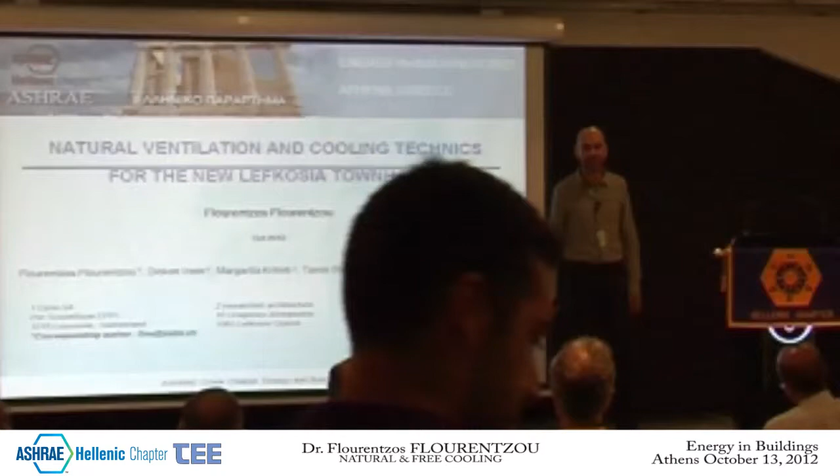Καλησπέρα. I still hesitate if I speak in approximate English or in approximate Greek. My last speak in Greek, I did it when I was in the 5th class of secondary school. I don't know if I managed to do it, as there are not so many English-speaking people, I will try to speak in Greek. Συγγνώμη για τα ελληνικά μου, έχει πολλά χρόνια που είμαι στο εξωτερικό. Forgive me for my Greek, I've been abroad for years on end, so I will try to improve my Greek.

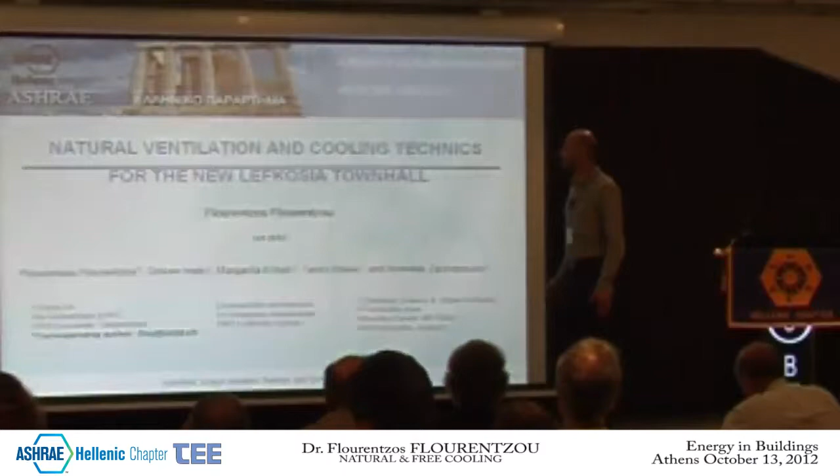Nonetheless, I will discuss natural ventilation and cooling techniques, using the Town Hall as an example. Μόνος μου δεν θα μπορούσα να σας μιλήσω για αυτό το κτίριο αν δεν ήταν ένας αρχιτέκτονας πίσω για να ακούει ένα φυσικό, αν δεν ήταν μηχανολόγοι πίσω για να ακούν τις ανάγκες και να μπορούσαν να προσφέρουν τις τεχνικές λύσεις. Είναι μια συλλογική δουλειά.

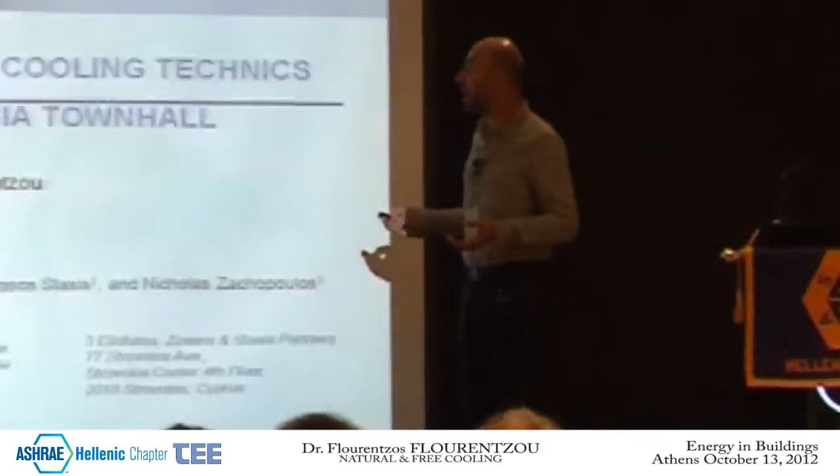Μιλήσαμε για passive buildings. Για να καταλαβαίνετε τα μεγέθη, ένα passive house στην Ελβετία είναι 30 κιλοβατόρες ανά τετραγωνικό και εγκαταστήνουμε 10 βάτα ανά τετραγωνικό μέτρο για τη θέρμανση. Ένα διαμέρισμα 200 τετραγωνικά θέλει 2 κιλοβάτ θέρμανση εγκατεστημένη. Δηλαδή μπορείτε να θερμαίνετε το σπίτι σας όταν το heating system χαλάσει, με ένα πιστολάκι μαλλιών μπορείτε να θερμαίνετε μια κατοικία. Αυτό είναι το passive house.

Μιλούμε για άλλο πράγμα, δεν μιλούμε για τα ίδια κτίρια που γνωρίζουμε. Και οι αρχιτέκτονες και οι μηχανικοί θα έχουν τεχνικές απαντήσεις για άλλο πράγμα από αυτό που ξέραμε. Είναι άγνωστο, όταν είναι άγνωστα πρέπει να τα προσομοιώνουμε, θέλει γνώση. Θα μιλήσουμε για passive cooling, δηλαδή δωρεάν cooling. Αν ήταν δωρεάν θα τρέχαν όλοι να πάρουν, αλλά δεν είναι δωρεάν, χρειάζεται γνώση. Και επειδή η γνώση θέλει κόπο, θέλει κούραση, θέλει μελέτη, δεν πάει κανένας να τα πάρει και προτιμούν να πληρώνουμε πετρέλαια, να πληρώνουμε μηχανήματα.

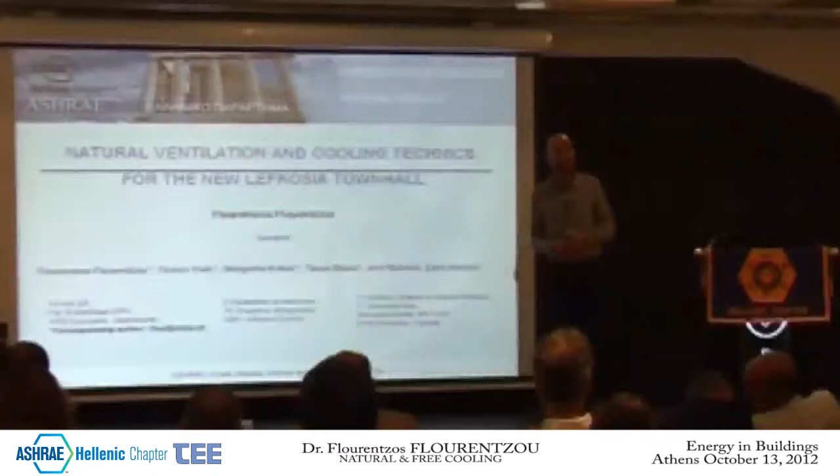Είναι όμως δυνατόν, θα σας δείξω ένα κτίριο που η πρώτη φάση ήδη... Well, I'll show you a building. Stage 1 is already up and running. This is the town hall of Nicosia.

Πολιτικοί έκαναν θεμέλιο λίθο. They were there, they inaugurated the building, they laid the foundation stone, and so they bumped into an ancient church. It seems there were 3 layers of antiquities there, a medieval town, a Byzantine one, and a Hellenistic one below that, so it took archaeologists 8 years to clean up the surface area. And so here you have it.

Ευτυχώς η UNESCO, ευτυχώς για το Δημαρχείο, έχει πει ότι απαγορεύεται να κάνουμε εκσκαφή σε όλο το χώρο, πρέπει να μείνει υπόγειο για τις επόμενες γενιές. It's imperative that we leave at least 1/3 of the plot to the next generations, because the next generations of archaeologists will come up with new ways to proceed with exploration. And so instead, architects could have built something on top, or they could have built columns and pillars.

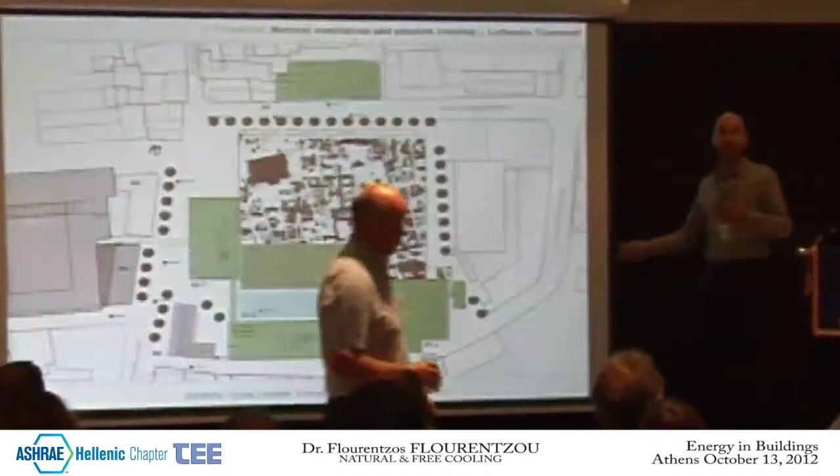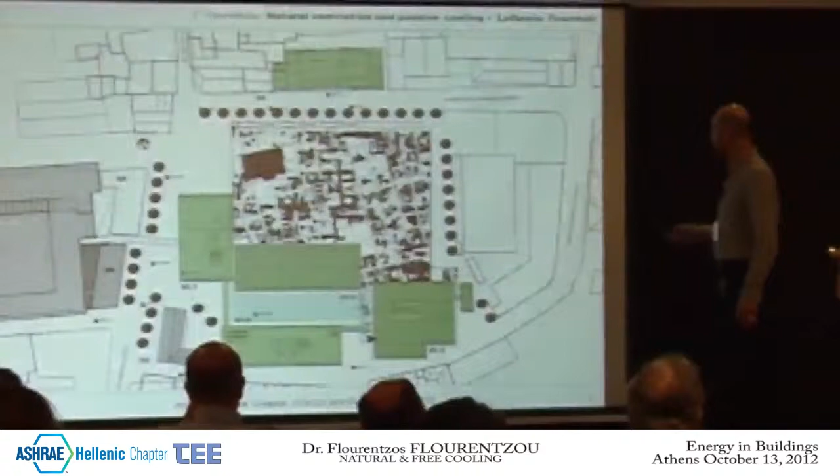I was in touch with the architect. I would tell him about the guidelines and the principles, and he would make plans. I'd tell him what's operating and what's not. So this is what we got. We have the square, which allows for passive cooling, and moreover, it allows for visitors to look at the antiquities as well.

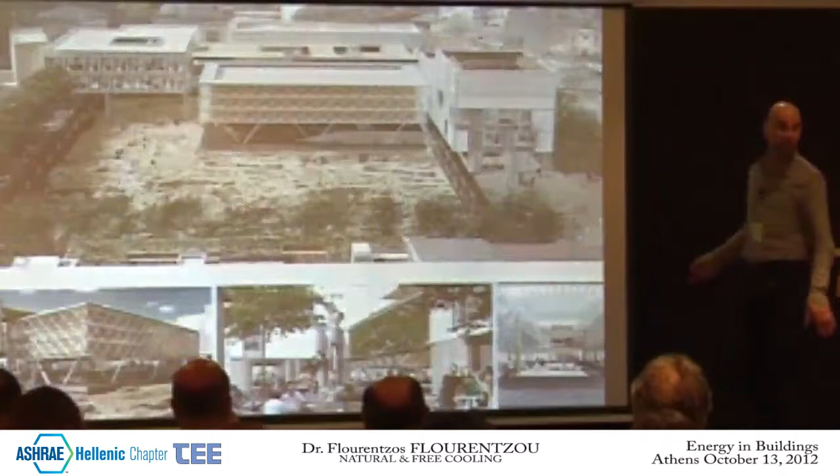This is a simulation. This is a building that is almost complete by now. And the building will look like this. We will have 3 buildings for offices, one for the so-called municipal hall or city hall meeting premises, because it has to be light, and the antiquities are below.

We also have the shadowy areas. We tried to have green areas and spaces. We didn't just want to have natural cooling, but we also wanted to have good conditions on the outside. This is the part of the construction that is already there. Let's have a look at the figures.

If the building was constructed back when there was no thermal insulation and no relevant regulation, it would have needed 200 kilowatts per hour per square meter for ventilation, heating and cooling. Then we had the regulation which has just been ushered in. You've had such regulations for years in Greece, but it's new for us. If you have 4 centimeters of insulation and 3.5 for glazing, that's the U value, you can diminish the cost by half.

So we solved one problem. But then the problem became quite more acute because single-pane windows have no losses now. So in our case, we're going to go below 40 kilowatts per hour. Minergie calls for 40 kilowatts per hour primary energy.

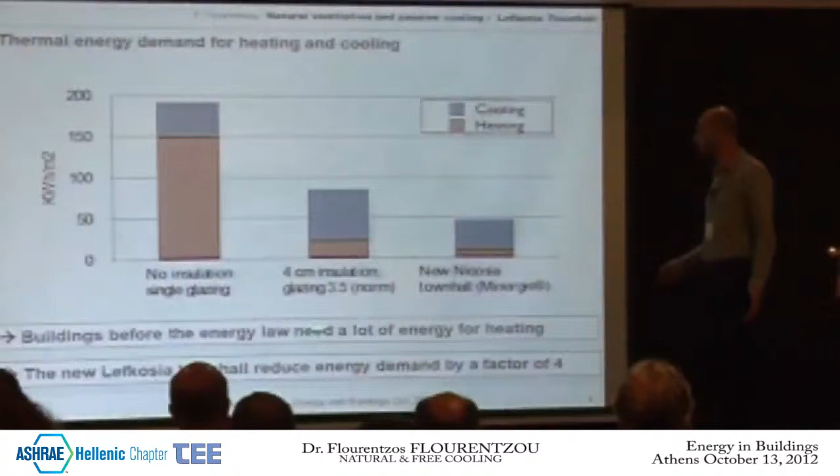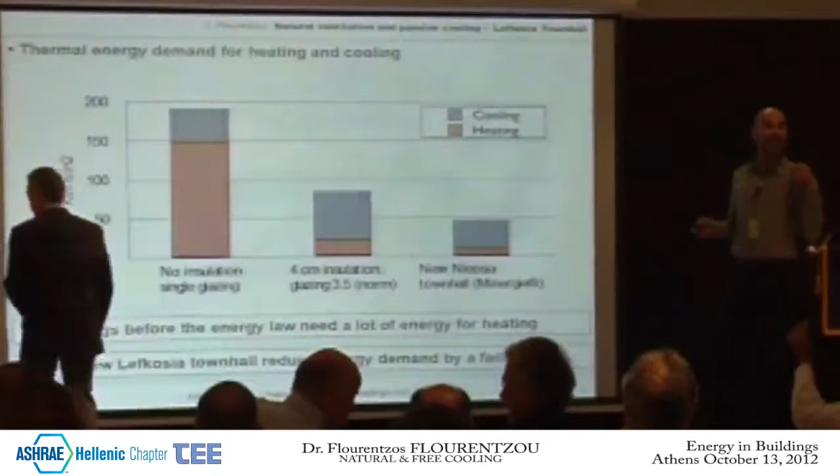So the buildings, before the energy regulation came, were consuming a lot of energy for heating and cooling purposes. This applies to Athens, given the photos we've seen. And even if you don't have thermal bridges, if you have some sort of insulation, things improve. And the new city hall of Nicosia is going to bring consumption down by a quarter, or rather divide consumption by 4.

And this is season 2 for carbohydrates - hydrocarbons, rather. We have consumed half of the oil that's on this earth. In this second stage, we will have to pay a higher price for oil. So we will have to make the relevant calculations.

I have a 30-watt computer there for one company to be able to sell that, and for it to have 5 hours of standing battery, well, that's changed, so you have to divide by 10. When there is a need, there's technology.

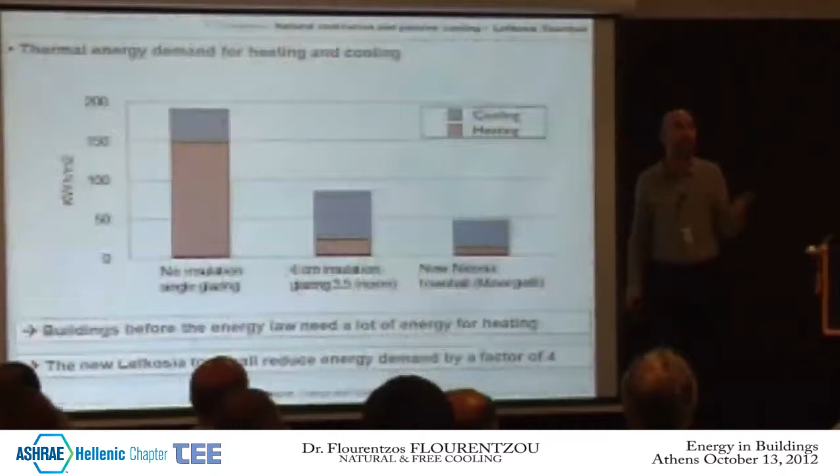Now, where can you get hold of this technology? In every house, unlike computers that are produced in plants, in every house you have architects and engineers who have to make leaps and bounds technology-wise.

We use 10 passive techniques in this building: 10 centimeters thermal insulation, double glazing, low E, and no thermal bridges. Moreover, we have almost perfect solar shading.

We also had high apparent thermal mass, optimum dimensioning of openings for passive lighting, 70% of natural light autonomy, and high efficiency artificial lighting.

You see, if you don't have thermal mass, you know what the impact will be, or we will discuss it later. The dimensions of the openings need to be optimal. We have to find trade-offs.

For lighting, heating, and solar protection - every use and every space has different needs.

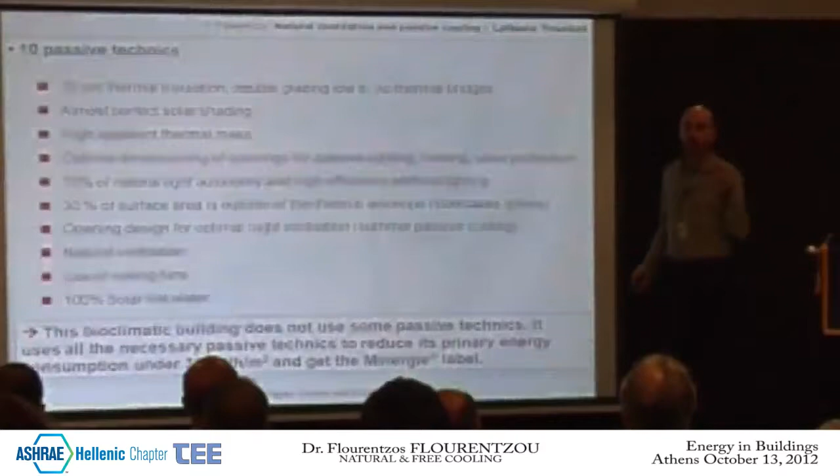Mr. Papadanil, of course, used a rule. He said we will all have no openings in the north. Please don't use it in your offices. Your rule, Mr. Papadanil, applies to residences, but it doesn't apply to office spaces here in the Mediterranean. It works in Switzerland, but not here.

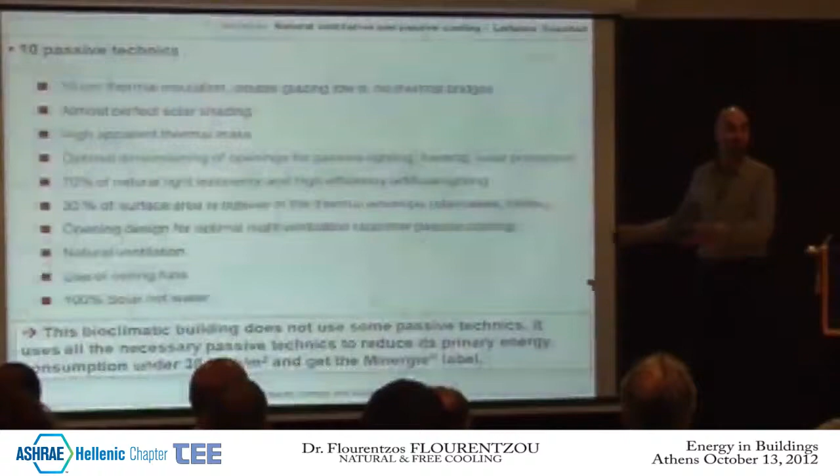And then you have 70% natural light autonomy, like I said, and high efficiency artificial lighting. We can't have conventional lamps and air conditioning working in one place. Maybe in Switzerland that would be okay because it contributes to heating the area. But in this case, in this part of the world, it wouldn't work.

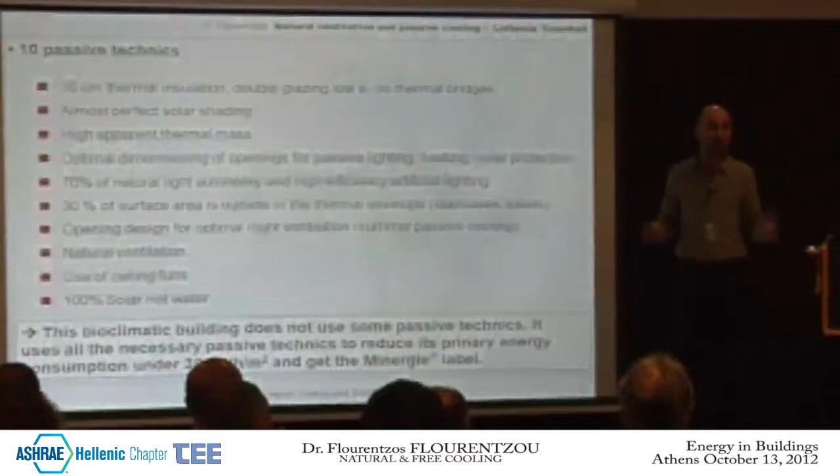30% of the surface area is outside of the thermal envelope. And this, of course, wouldn't work in Switzerland. But you see, we in Cyprus have sunshine for almost 300 days a year. We can actually go outside and have a picnic at Christmas time, for that matter. So we have different needs.

Opening design for optimal night ventilation, summer passive cooling, natural ventilation, and use of ceiling fans. Maybe ceiling fans will seem to you as quite an obsolete technique, but let's see what they can do to a passive building.

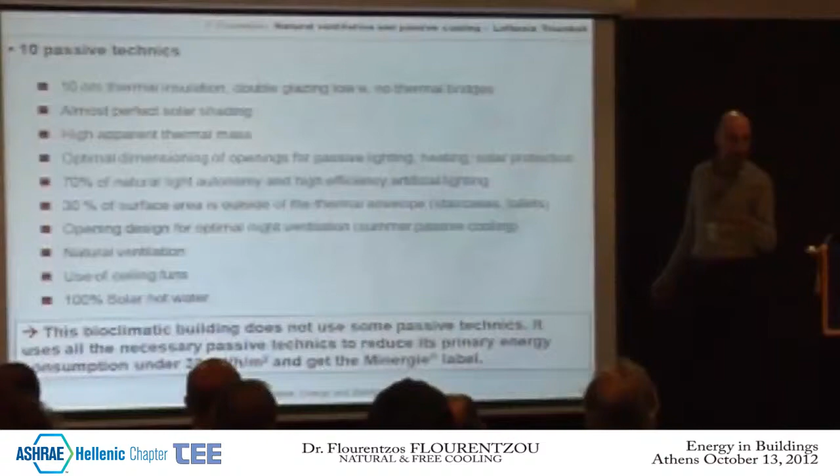And then you have 100% solar hot water. When you get sunshine for 300 days a year, you are not going to use electrical power.

This bioclimatic building does not use some passive techniques. Okay, we've seen such buildings. We have a well, we have a louver, we have a channel, and you can get the air in. These are some scattered pieces and bits of ideas.

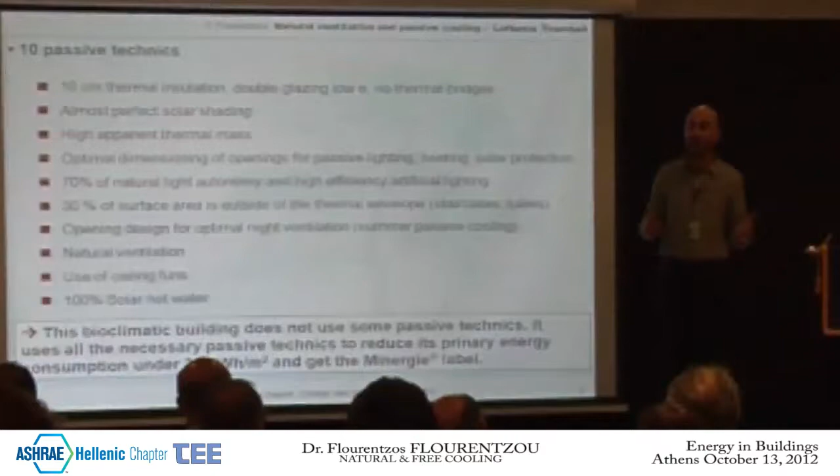The Swiss have a lot of good things to suggest, and they also have a few bad things to suggest, and this goes for Cyprus as well, it applies to us. One good thing I borrowed from the Swiss is that they say one thing, they do that thing, they see how it works out or not, and then they try to improve.

They make measurements. How much is consumption? Primary energy, 38 kilowatt hours per square meter. Okay, this is bioclimatic, but as long as it pays out, as long as it gets results.

This is what we did in the case of this building. This is not one simple building that will be comfortable. My grandmother's house was actually bioclimatic, but its energy consumption was zero.

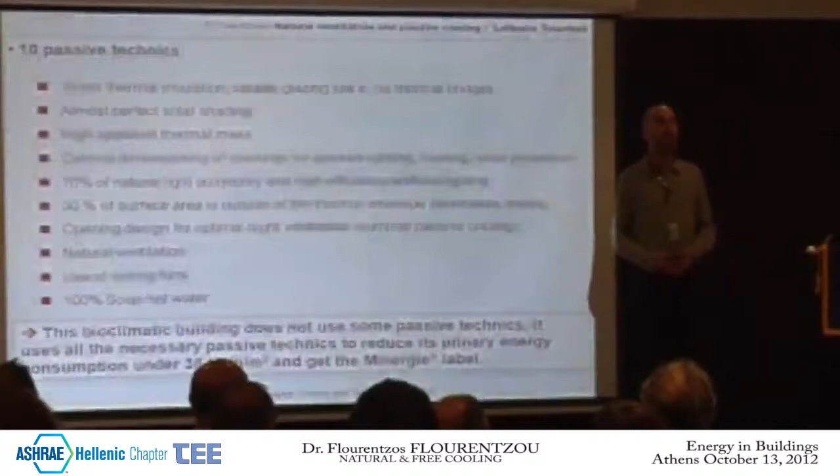Then again, it didn't have 500 lux that was self-standing for you to work in your office. And in my grandmother's house, the temperature was good because the outside temperature was 45, and then within the house, the temperature was 32 degrees.

Minergie is something that you heard about this morning.

Let me start with thermal insulation. We went from 5 centimeters to 10 centimeters, and there's more to it than that - thermal bridges were taken into account, and we opted out of thermal bridges. We did use thermal insulation on the ground. On average, temperature in the summer is 20 degrees, but we needed thermal insulation at the base of the building because without it, you would get the cold in your feet. So we have thermal insulation there.

U value is 1.3. The glass panes were made in Cyprus, 1.3 U value. You don't have to import them, you don't have to buy them from Germany. No such need.

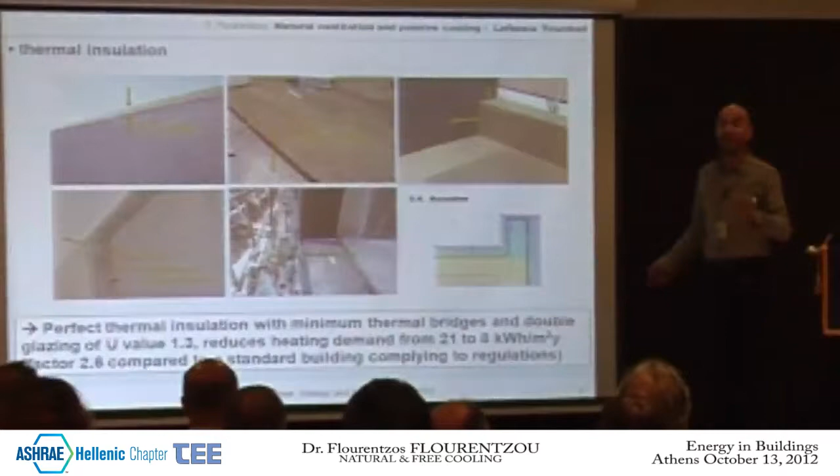So from the reference building of Cyprus, we got down to 8 kilowatt hours per square meter, which is next to nothing. I mean, your hairdryer would need more.

This worked for 1 year. It was actually constructed, built last year. I went there in the summer. They told me it worked okay, better than the simulation tests. They told me that they would just heat the building for a quarter of an hour and it would do for the rest of the day.

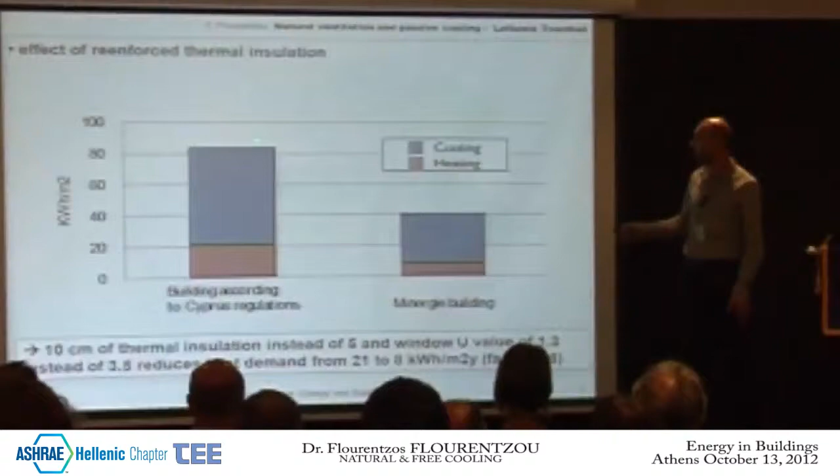Reinforced thermal insulation - we divided everything by 2.6. But then we are dealing with the cooling load. And let's see what we did with that.

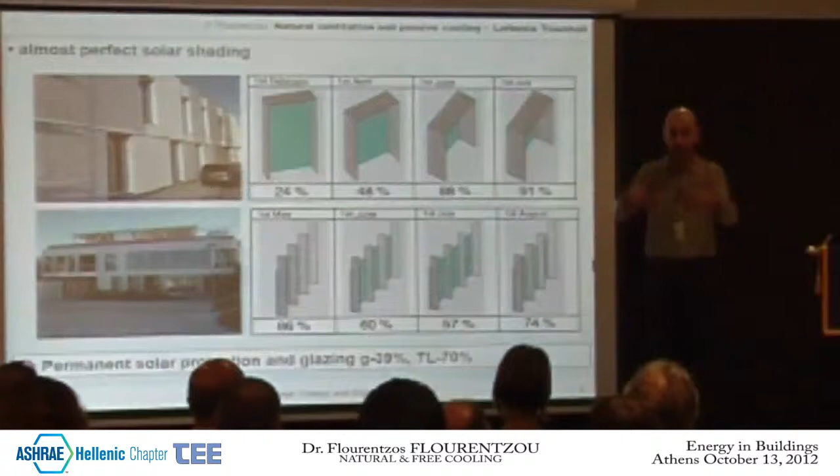The first thing you need to do when you have water that is coming in, you're not just going to find a pump - you have to somehow find a way to block the entrance of the water, and find a way that would not be that costly. So it didn't cost that much in this particular case.

We had almost perfect solar shading. Orientation helped us. In this case, we had a building oriented north-south, north-east-west, and we didn't need special systems. We just changed the dimensions of the openings. We were facing the north by 15 degrees.

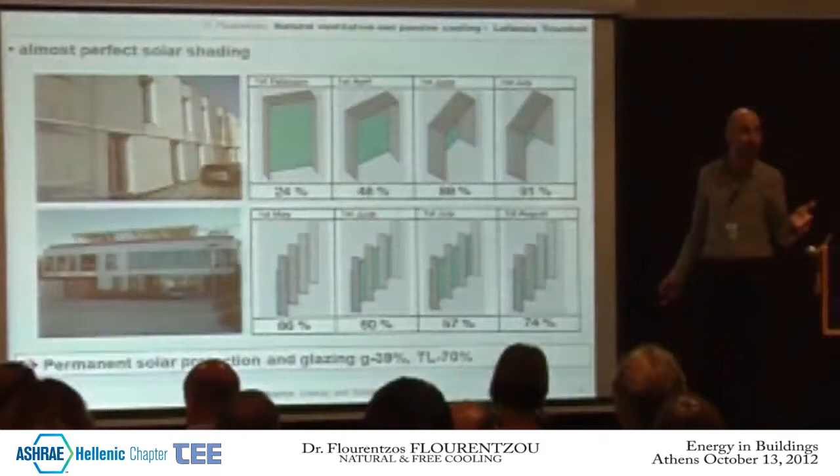Once in Switzerland, I was faced with the same angle and said no shading is needed. But then this was about an office space where the offices were really sunny, so I made amends in this case. We introduced those fins, and as you can see, we are almost catered for thanks to them, and G value for the panes was 0.4. After simulations, that turned out to be quite effective.

This building was a cause of headache for us. It was 10 meters high, full of glass panes, and it is facing the west, so we thought maybe we should have one shadowed or shaded square there, an opening that would solve everything here.

So this is an ideal building to explain to students about how you should properly orient the building. You should have the office spaces in the north because you want to avoid cooling problems, not heating - heating is not a major issue. And then you have to take into account the importance of lighting.

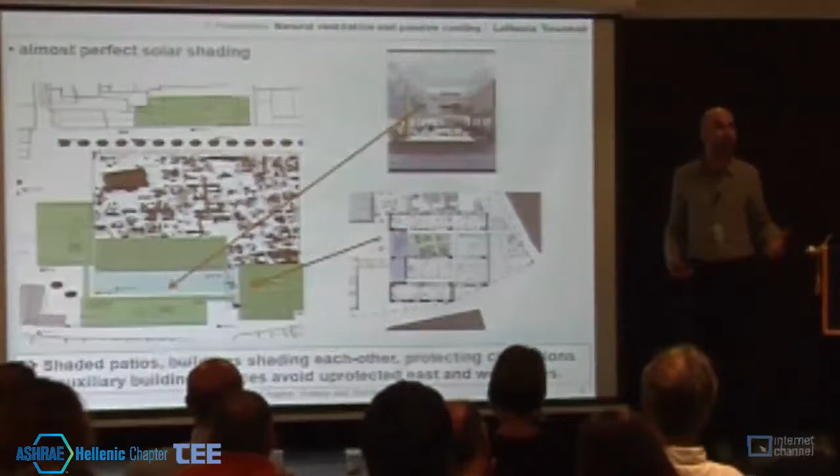20 kilowatts per hour is a lot of energy - it's as much as a building will need to heat itself. So I would look into possible sources for natural lighting from the north, and thus all the offices are looking towards the north, and then you have the facade treatment here.

The west is always the toughest in our climates. There is no office space there, it's just the stairwell and open areas. And then this part of the building.

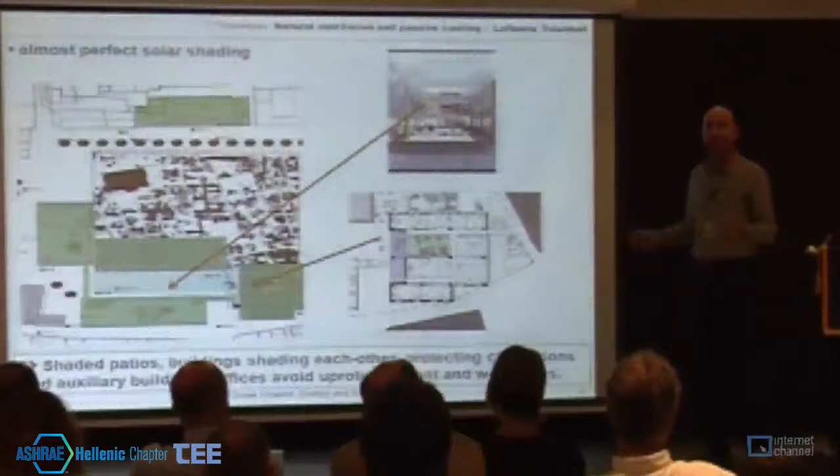I'll show you the layout as well. You have a small building there. It was built so that users could house all their polluting activities there, to avoid need for ventilation. And the water closets are also outside the confines of the air-conditioned area.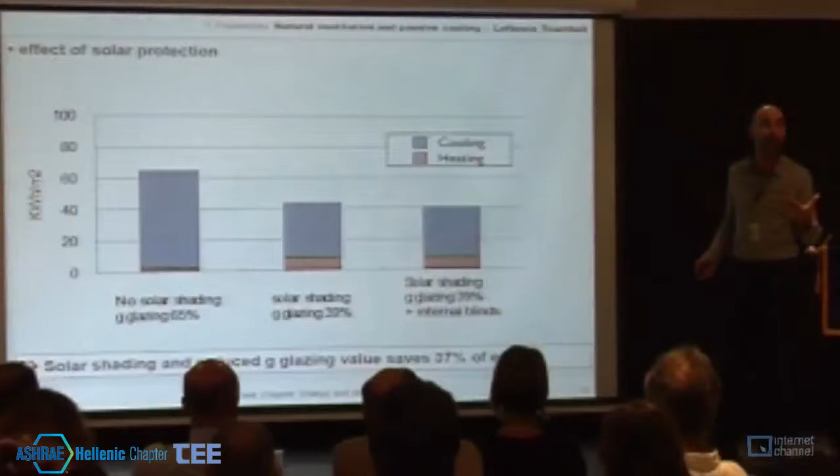Effect of solar protection: no solar shading gives 60 kilowatt hours per square meter. With solar shading and 39% glazing, we brought kilowatts per hour per square meter down considerably, with internal blinds as well, and this helps save money by 37%.

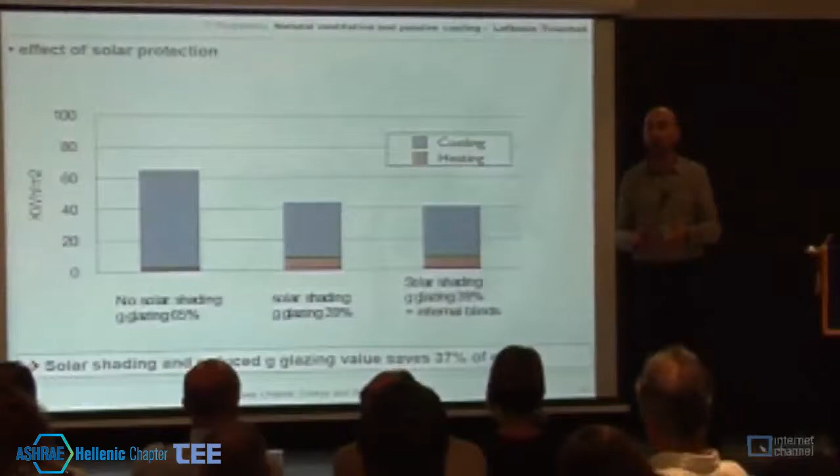Most of the buildings in Cyprus and Greece have external solar protection. It is important to have such protection, and it's compulsory in Switzerland - you can't have air conditioning installed otherwise. So we started aligning ourselves with the regulations that we got from the north, from the EU, but we failed to introduce yet another regulation on shading and solar protection. Hopefully your Greek regulation has that - we don't in Cyprus.

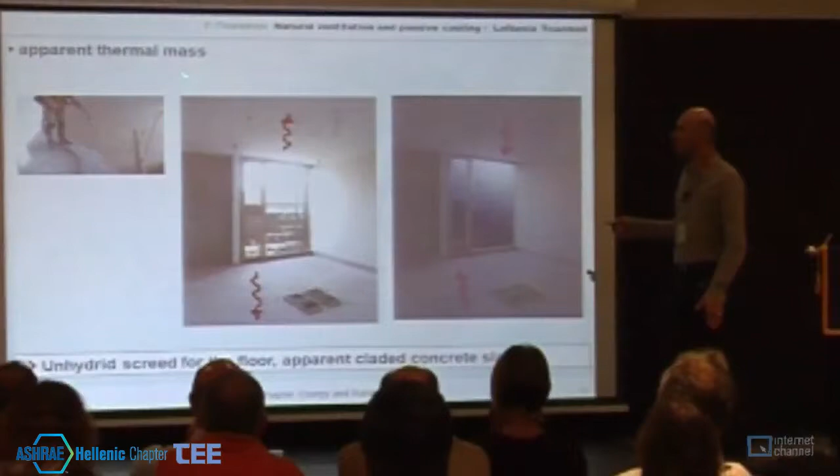Apparent thermal mass - we used ecological, eco-friendly gypsum, which would give us proper protection. So 4 centimeters will level out the floor, giving us the floor and the ceiling, and this is where we will store heat in the winter and unwanted heat in the summer.

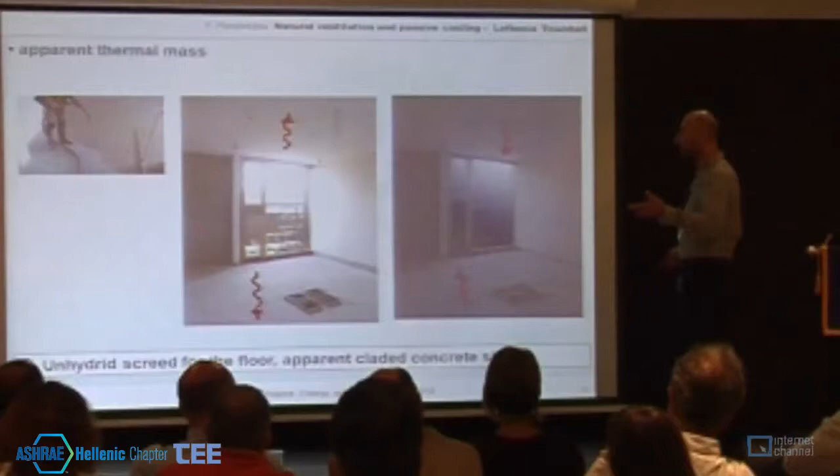It is very important - thermal mass matters a lot in our climates. If we discuss Minergie in the south, then thermal mass will have to be one of the criteria to take into account.

Opening dimensioning, we said we have to strike a balance between the light coming from the sun, and we don't have to exaggerate anything, so we have to strike the perfect balance. In this case, we used a panel 140 by 300 for each office, and we also used 2 panels facing south. They are open so as to make sure we have light in.

Natural lighting, 60 to 85% autonomy. We didn't use anidolic elements, but they are still being looked into. The good thing is that in Cyprus we have lots of light. We don't really use such elements, but at least we found out where we get light in from and where we get the air from. And so we didn't have frames, we got lots and lots of light, so that got us the autonomy I referred to, 60 to 85%.

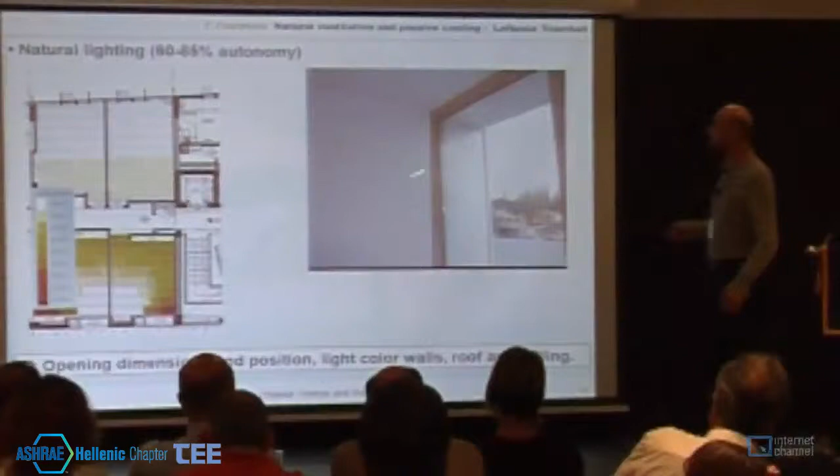All the walls outside and inside were painted white, and so we managed to have good performance. People who measured, or rather people there, told me they never used artificial lighting. It turns out that all public servants in Cyprus go home early.

Inside, outside, in the Mediterranean climate, our weather is good. So why should we have air-conditioned water closets? Why should we have smoking areas that are being air-conditioned? This is the smoking area. It's not air-conditioned. Stairwells are not air-conditioned either.

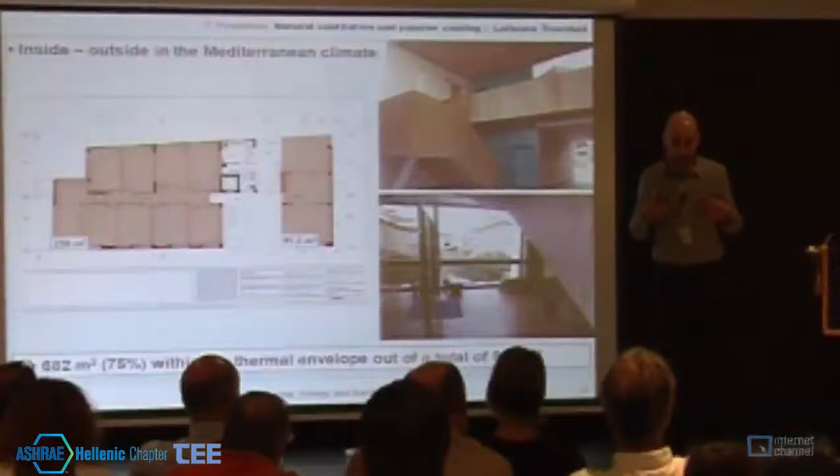We didn't start with bioclimatic designs per se. We started with a questionnaire. We asked people what would make them feel comfortable, thermally speaking. And 90% of the people who answered our questionnaire said they want something that's natural. I keep getting this air conditioning in the air, it's actually pestering me, it's a pain. No, unlike that system, we opted for different solutions.

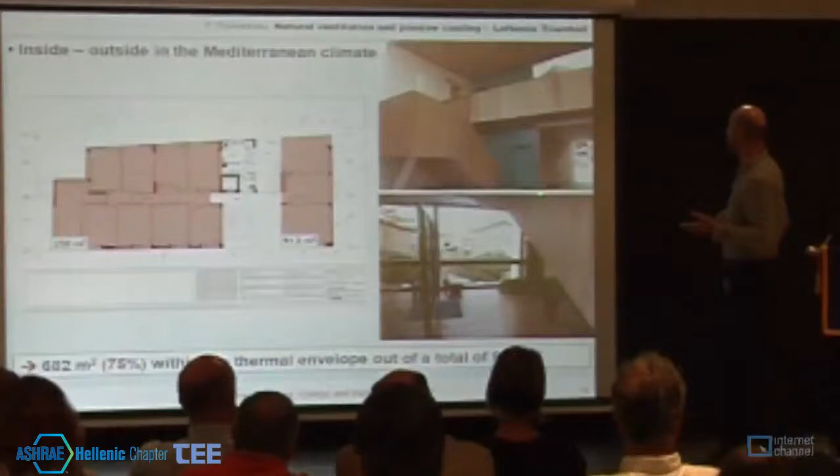So they filled in the questionnaire. They said that they wanted a smoking area. They wanted an area where they would have coffee. That's why everything is outside. And then I guess they don't have to pay taxes or penalties for the fact that they are actually...

This is a public service. When at the end of January people will come to pay their taxes, they will be able to be outside and they can smoke freely.

This is actually a monumental staircase, right? One that is the dream and very vision of every architect. In this case, I'm not going to discuss ecology in this particular case, but you see this wood is actually unglazed, it's natural, we didn't paint it. We used oil, so you can actually lick it if you want to. It's pretty natural.

We left 25% of the surface area outside the air conditioning system, so insulation is less. Night ventilation design.

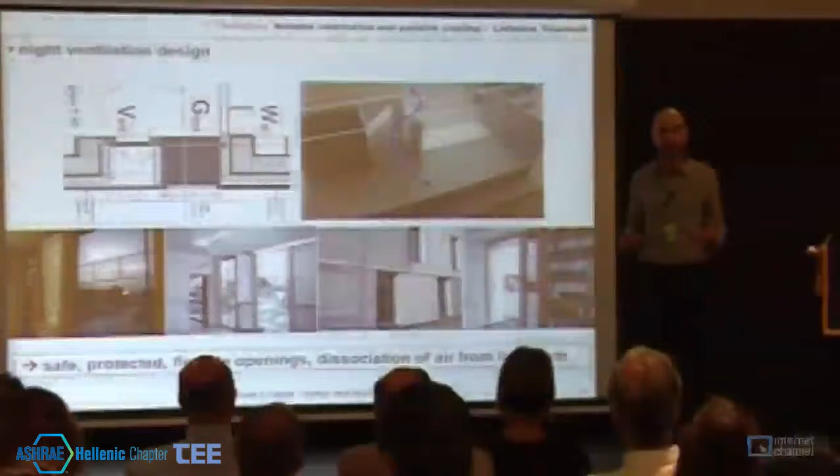It's not enough for you to just punch in 'I need night ventilation,' and then your simulation program will get you the solutions. It's important to have proper design. You have to leave scope to people, leave people scope with opening the windows.

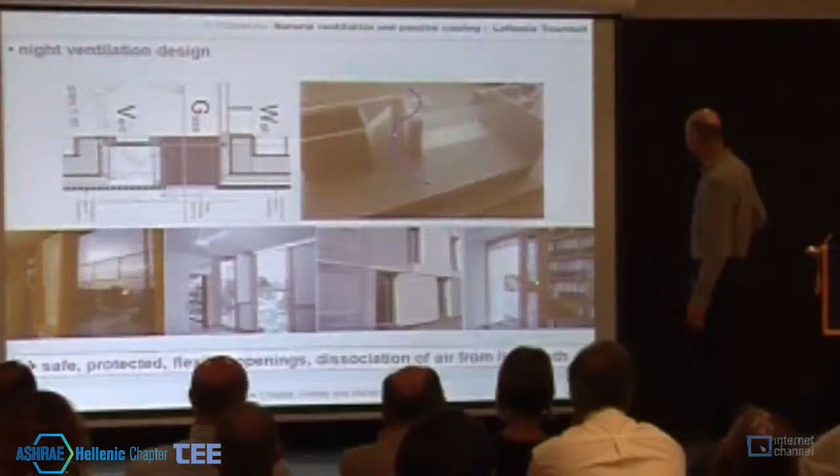You see, this is the building where the treasury of the municipality is, so all the money of the municipality is there. The financial department of the municipality's house is there, so you have to let people open a window sometimes. So have a look at the photo.

We want to have stack effect. To have the stack effect, you have to have height. This is 3 meters high. But if you open one big window, you will have lots and lots of air coming in, in winter and in summer, so it's going to be very, very hot then.

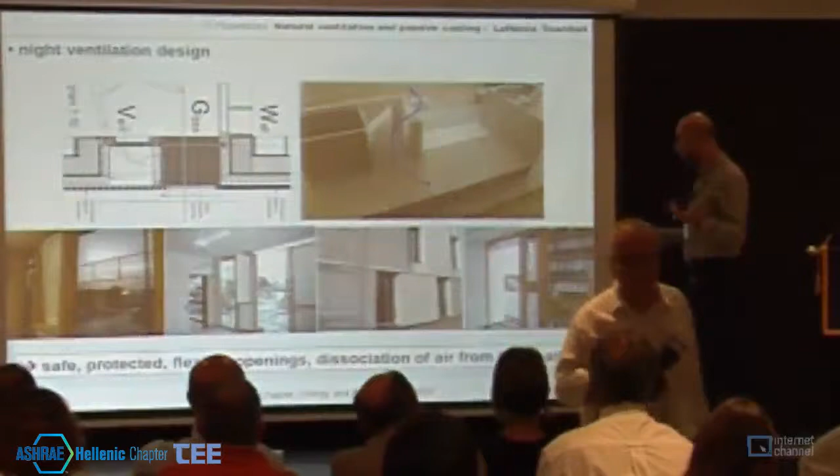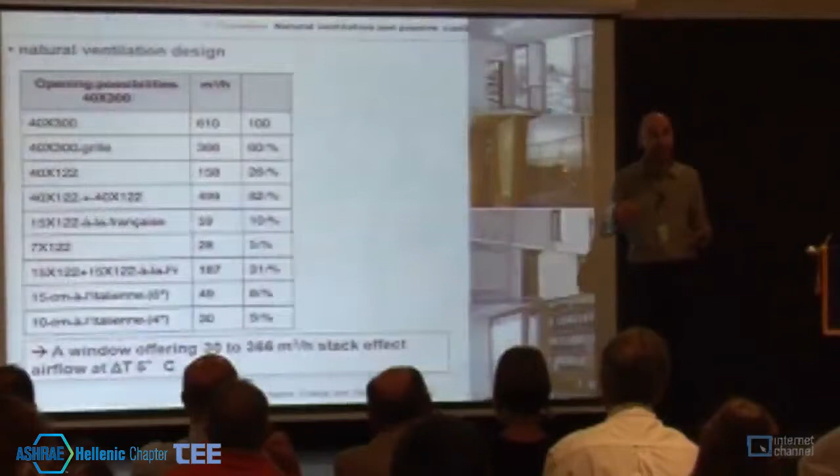What did we do? We had the night cooling. We also had this divided in two, so you can have a smaller opening when the weather outside is bad. In Switzerland, they have heat recovery units instead. In Cyprus, heat recovery will not actually be worth its money, because we have a very small temperature difference, and so the electricity you're going to spend is going to be more than what you will win or save.

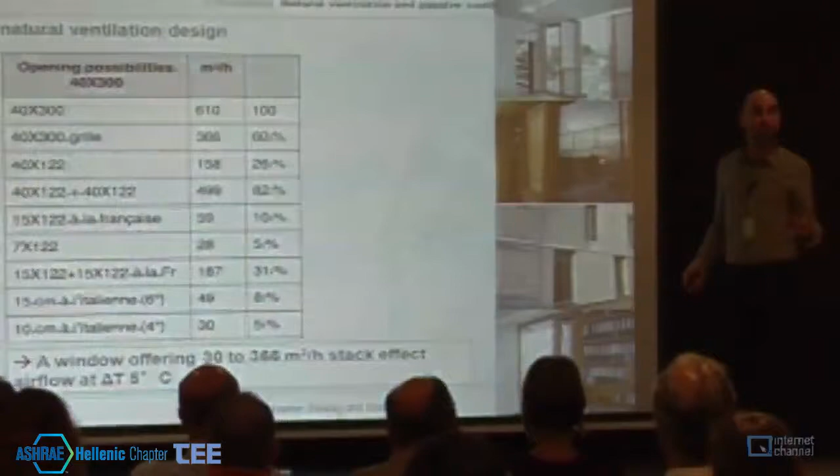So we tried all possible combinations in the openings, where we're going to have it halfway, have it tilted, have a louver, we tried everything, so that the employee who's there can intuitively act and get 30 cubic meters or 10 liters per second. I don't know what the metric unit you would use in Greece would be, but you can save up to 366. So the employee will just tilt the window when they get into the office.

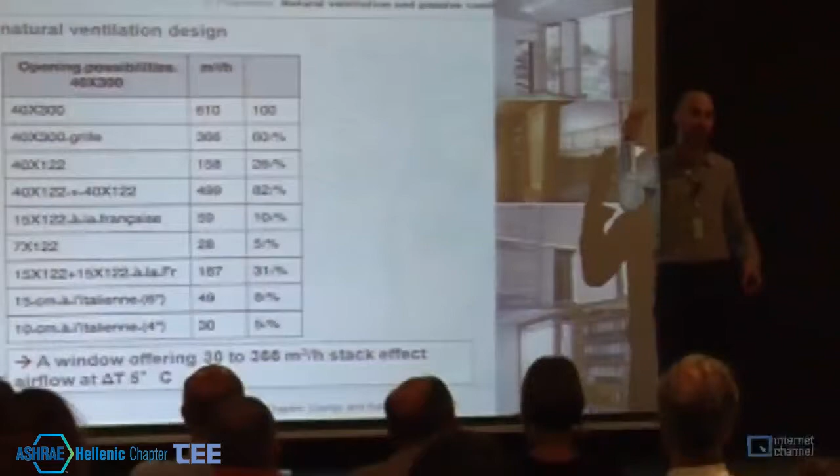It's true that many of us suggest that we do not trust the user. It depends on what you give the user. When the planning, when the design is in favor of the user, when the design is such that it will make the user tilt it intuitively, then it's going to work both in the summertime and the winter.

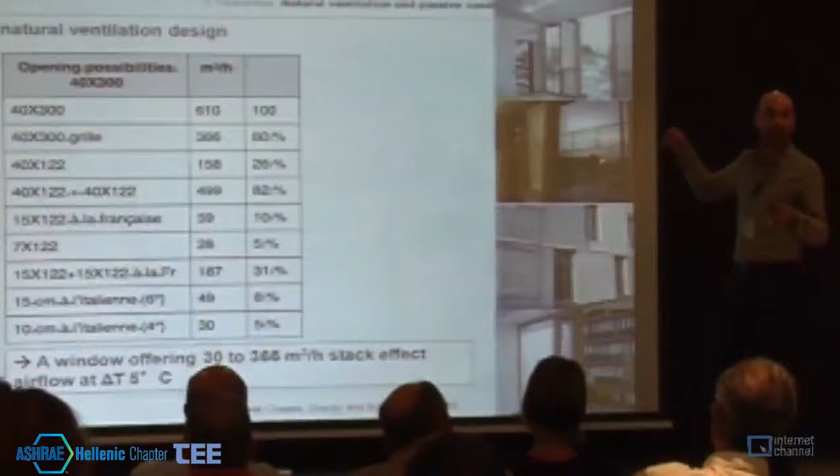When it's 45 degrees outside, no one will intuitively open the window to get the heat wave inside the office. And when it's actually breezy outside, nobody will intuitively open the window either. This is the effect of night cooling.

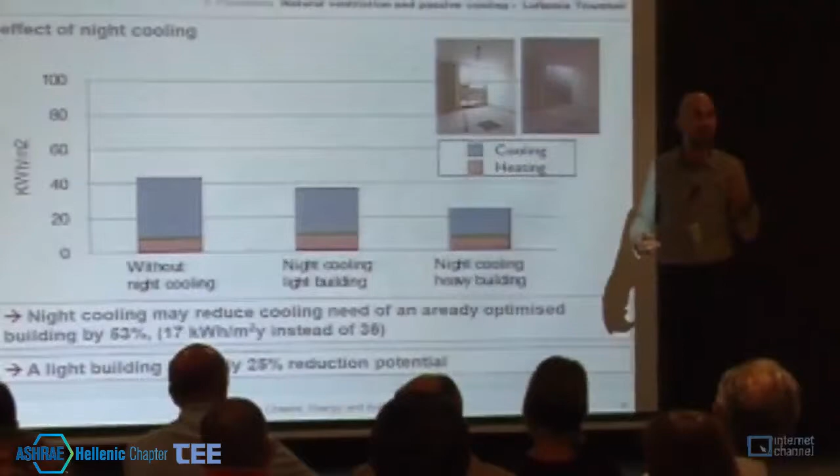Our climate is unlike Switzerland. You have passive heating in Switzerland, but here in Greece and Cyprus you have to do something about winning something thanks to the cooling temperatures of the nighttime, without letting robbers in, without letting particles in, without letting dust settle.

A light building has only 25% of reduction potential. This is exactly why we bothered to find materials with thermal mass.

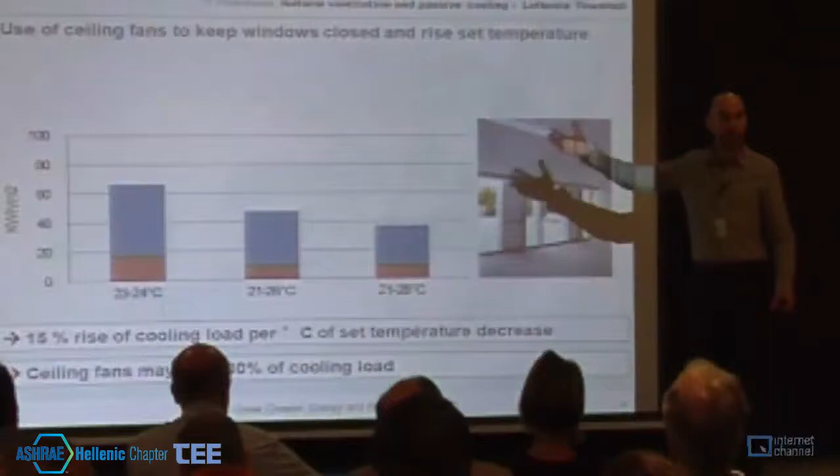Ceiling fans, people kept them especially in the mom-and-pop stores because that made sense. I remember whenever I went to the small stores, there were ceiling fans, and now they're back. They're back because instead of having users open the windows and letting subsequently warm air into the room, ceiling fans work by trapping the cool air.

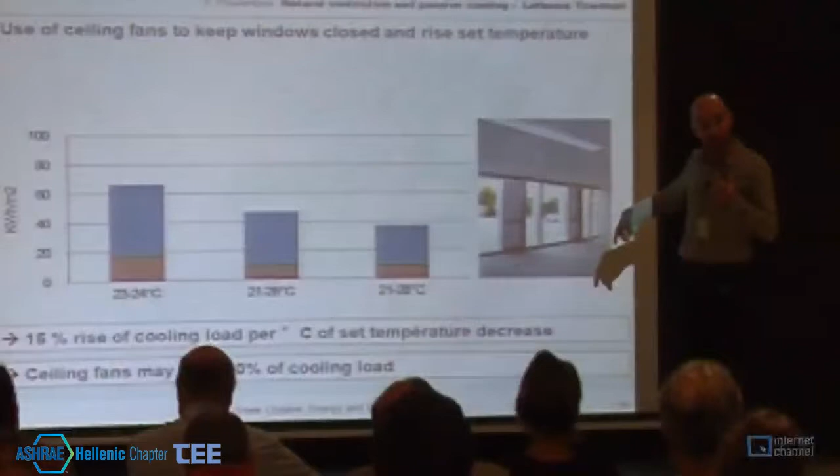When the temperature is 30 degrees and you have a ceiling fan going, you feel like it's 27 degrees, but the building temperature will rise. As temperature rises, the outside temperature will be 33 and the building's temperature will be 30 instead. My feeling will be 27, so you have a trap. You shouldn't let the user fall into that trap intuitively, which is why we

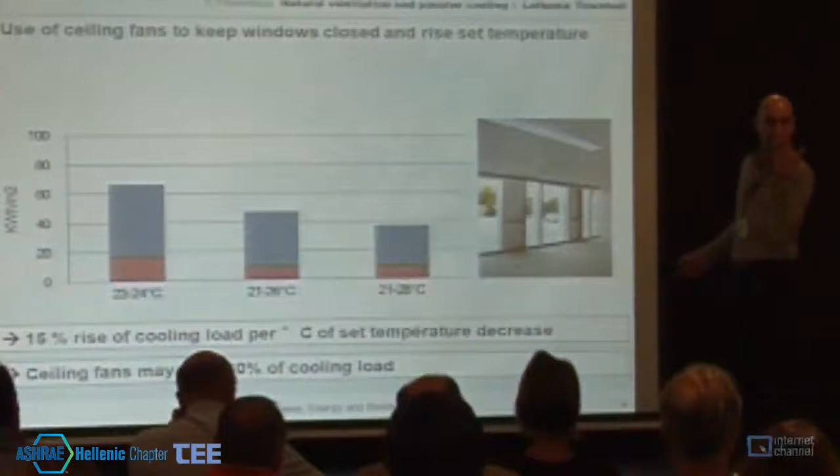offered them the option of having tilted windows instead. And it turns out, I've seen it this year in Cyprus, people opt for having their windows tilted instead, and they use their ceiling fans.

People this year, as I noticed, set the air conditioning unit at 28 degrees and not 23 or 24. They thought about it themselves. We never told them. There was a user's manual.

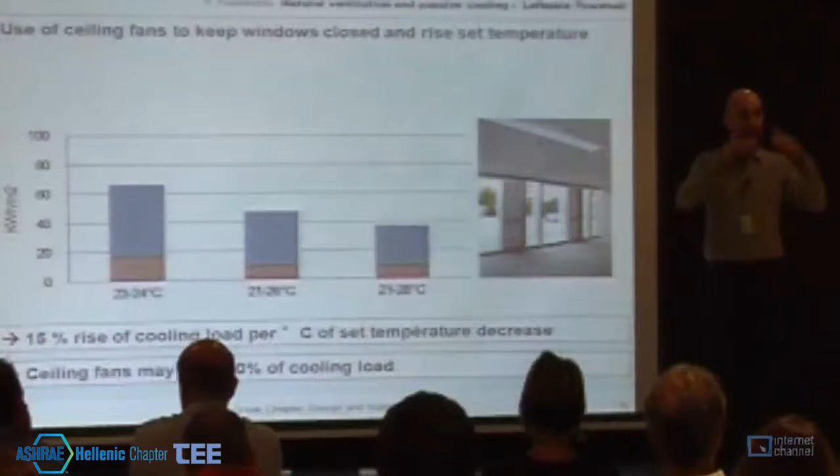We started with the questions and the questionnaires, and we drafted eventually a user's manual last week. We told them about the ideal temperature, and they turned out to be proud because they told us, we thought about it before you came with the manual. We knew how to change the set temperature, and so we turned our temperature.

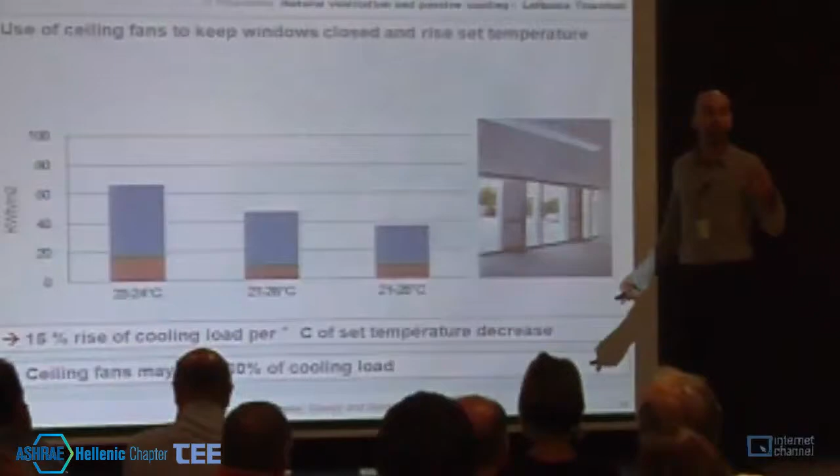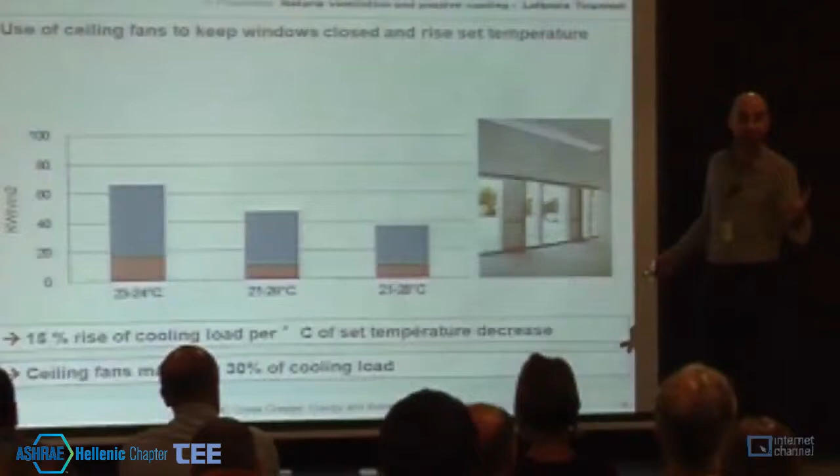Such a building calls for a study or design of 30 or 50 days, but it's worth the money because buying equipment instead will cost more. There is a need for correct cooling load dimensioning.

When you overdimension, you pay more. We paid 10,000 euros on top to buy state-of-the-art equipment, which would give us a COP of 5 at 70%. When you are good in terms of dimensioning, you will get 5, which means 1 will generate 5.

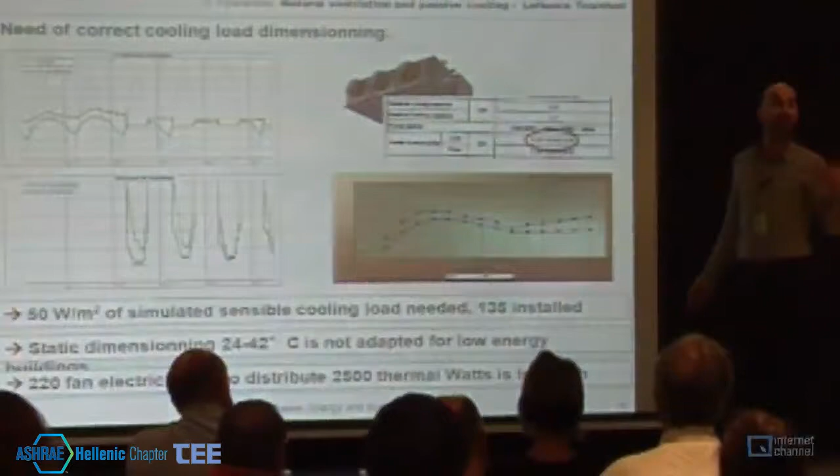But in Cyprus, we want to use everything in excess. And so we do. Normally, we exaggerate. So you will get stuck there at 2.5.

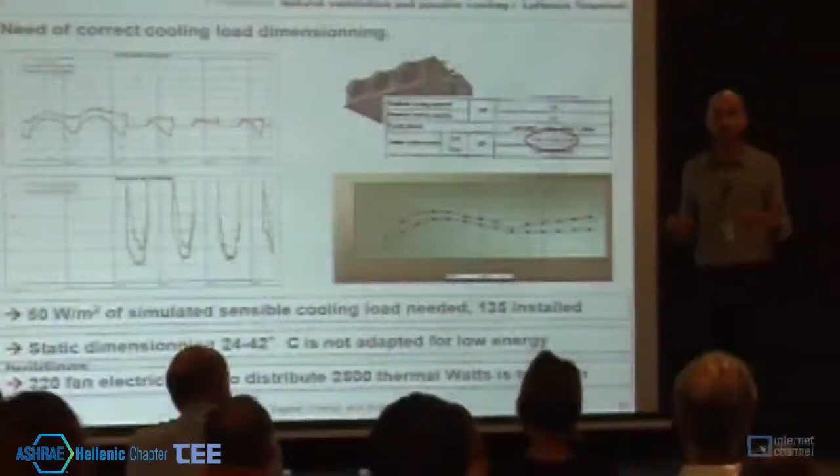Engineers wouldn't dare go that low because architects will go, and then the users will pick a fight with the mechanical engineer. When everybody works as a team, architects and engineers will work together, and the architect will not just be the salesperson of a piece of equipment. The architect will be both a salesperson and someone who works with the engineer, and the engineer will not be selling either. They will spend hours making calculations too.

And this is what happened in the case of the people who designed this building and the people who constructed it. Monitoring outside, the Swiss will tell us this is how it is and to do it accordingly. So this is what we did. We measured 45 degrees Celsius outside, and it was 30 degrees inside.

I was fortunate enough to be in a cooled, occupied office. Half of the building was empty, the rest of it was occupied. In the case of the occupied office, you have the temperature degrees there. At nighttime, there was no night cooling there because we hadn't told them to do so.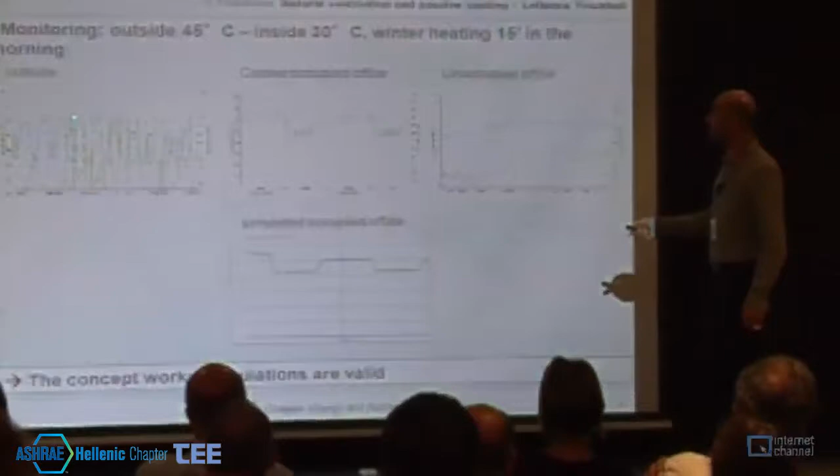We haven't explained it yet. Then you have the simulated occupied office statistics and then the unoccupied, free-running office. It was 45 or 43 degrees outside, 20 inside. The concept works.

I'm going to rush through the slides and photos. You have another 5 minutes, there's a chair. Right, so let me show you.

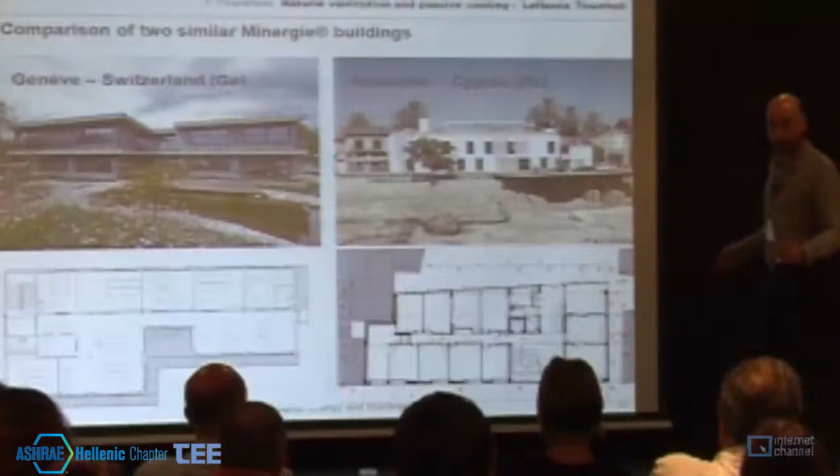A couple of photos. It just so happens that we have a Minergie building in Geneva and another one which is still Minergie in Nicosia. In this case, we had big openings in the south, and in this case, we had small openings to the south because we just wanted to confine our passive heating needs. In this case, the opening, or rather, the north is glazed by 70% because we needed to have light. These are the facades, south facade for the building in Geneva, and then you have the north facade of both buildings.

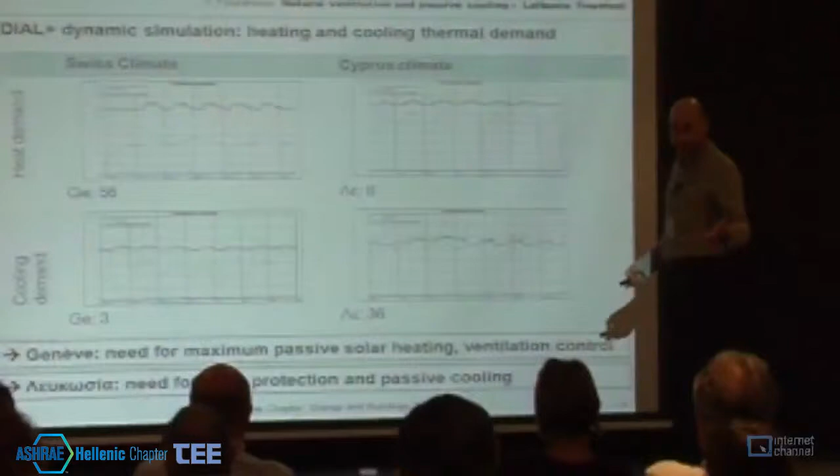We are going to have our own passive cooling building. This is how it's going to work. This is the Swiss statistics, Swiss climate, 21 to 19. And the outside temperature may be -10 or up to 5 or even 7. When they get a night, January break, sunny break, it's 7 degrees, and that's good.

Now, Cyprus, climate in Cyprus, at daytime, especially during the working hours and weekdays, normally you get more than 15 or over 21 degrees on occasion, and you get the sunlight in. It's striking you and it's hitting you. So you see, the buildings work in a different way.

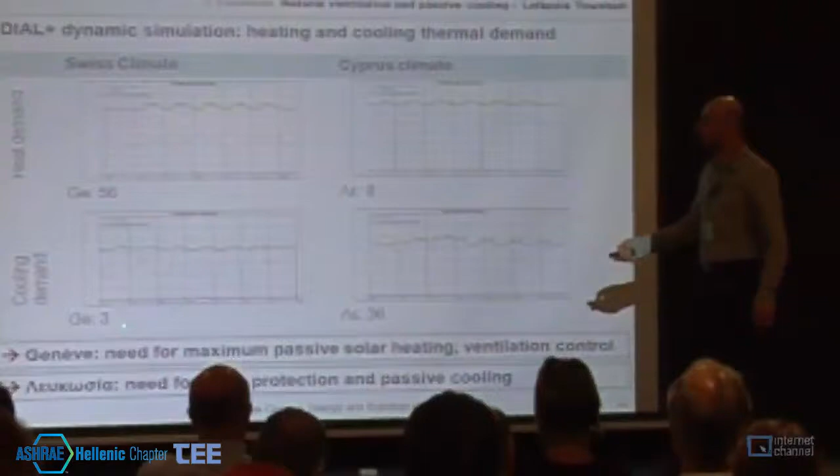And in the summertime in Switzerland, you will get a couple of times when the temperature will exceed 27 degrees. You will need 3 kilowatt hours per square meter for cooling purposes and 56 for heating purposes. And in Cyprus, it's 8 for heating and 36 for cooling. So it was cooling and heating respectively.

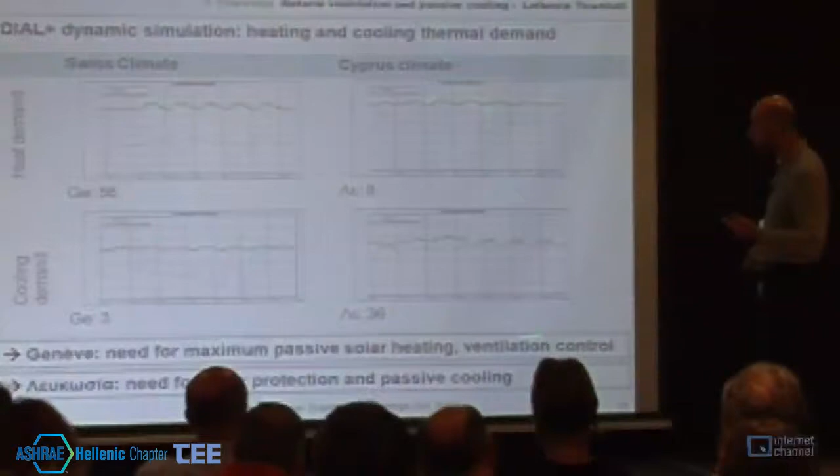Just as long as you have a good building, not the old ones. In Geneva, you need maximum passive solar heating and ventilation control. In Nicosia, you need solar protection and passive cooling.

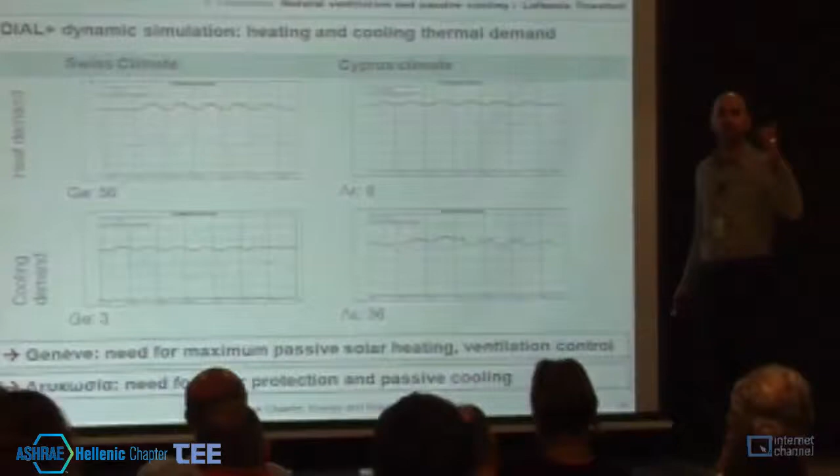So these are the statistics for July. In Nicosia, where the climate is dry, at night the temperature may be 18 or 22. Maybe it will get up to 28 degrees 5 days a year. So this is what you get on average. This is a so-called natural system that you're called upon to optimize, and this is unlike the respective systems in Switzerland, almost zero energy office building.

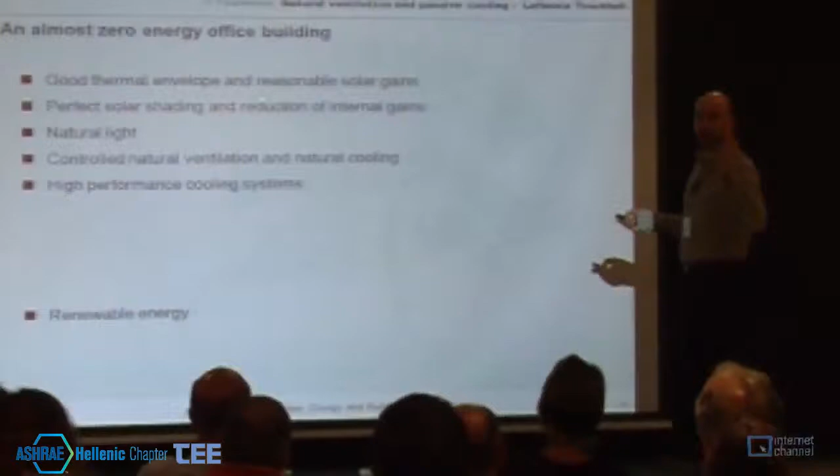Let me sum up. We did not study residential buildings. This is about office buildings. We need good thermal envelope and reasonable solar gains, perfect solar shading and reduction of internal gains, natural light, controlled natural ventilation and natural cooling, as well as high-performance cooling systems. Renewable energy is down the bottom of my list. It's actually the cherry on your cake.

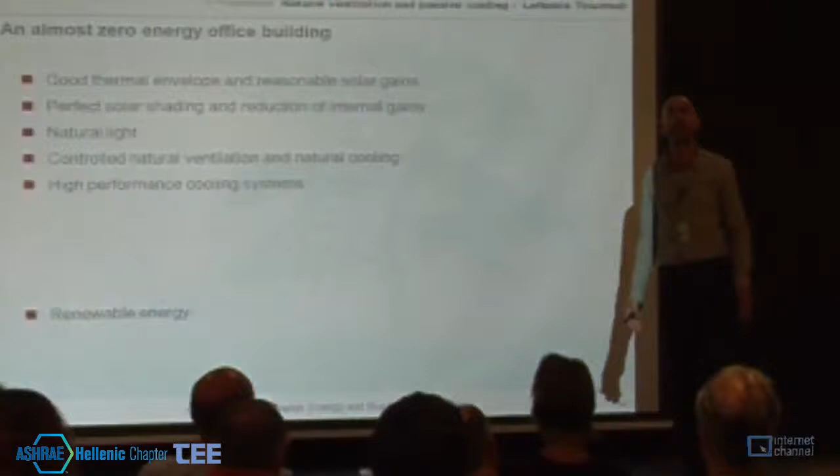People claim that one roof with PV will work and it will be almost zero-energy building. No, this is not true. So photovoltaic will not just turn your building into a bioclimatic one.

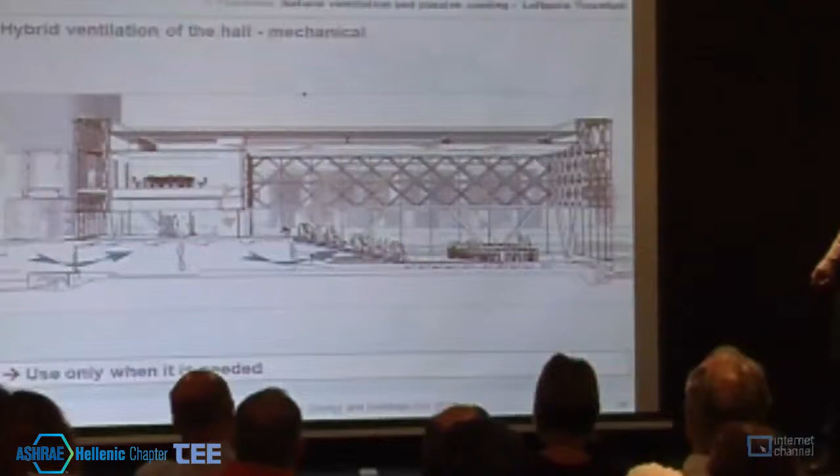These buildings have some PV photovoltaic panels on top and maybe geothermal to some extent. In this case, we didn't have solar cells. We thought, okay, let's consume 15 kilowatts per square meter. I made the measurements. Consumption is 50 kilowatts per hour per square meter, including everything. The building uses energy mostly for the server. So we didn't use solar panels.

When all Nicosia will be passive and all the industrial areas will be full of solar panels, then okay, let's change the character of the center of Lefkosia, of Nicosia, and let's have solar panels there. Until 2050, when we're going to get down to 2 kilowatts per hour per square meter, fine.

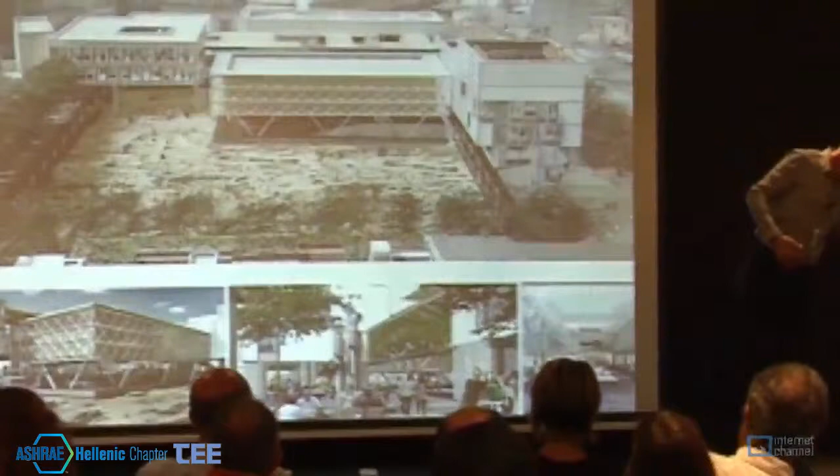In the meantime, we put on top of the building an open-air meeting room, because we also think we can save energy from up there instead of having people with beamer. So instead of having them inside the building, we have a green roof, we have shading, and so they have a meeting room there, they can convene, and I think it works better for them and for us.

Thank you very much.